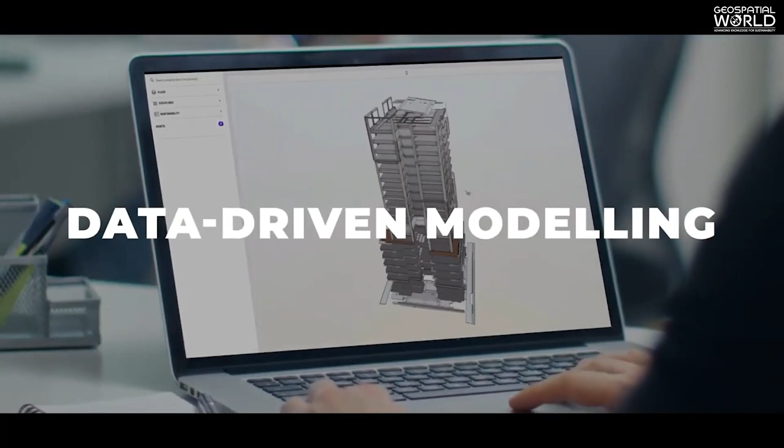Advanced digital approaches involving data-driven modeling and visualization now offer architects, engineers and construction professionals new ways of understanding how cities function and predicting how changes in their design could affect lives.

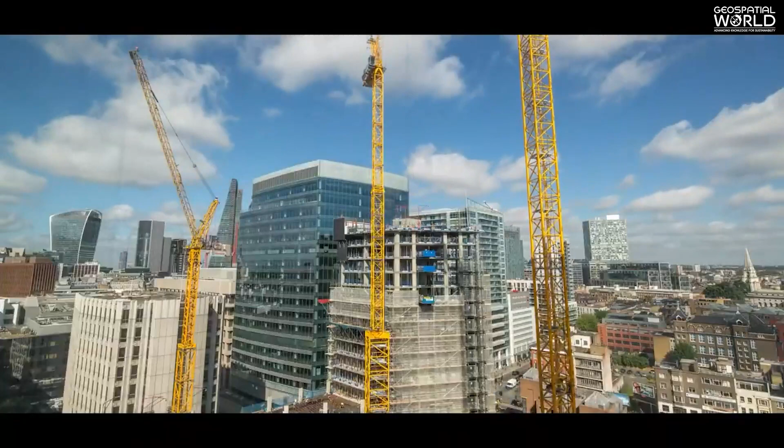Digital twins improve the planning and construction process to make it as time and resource efficient as possible. Digital twins can improve environmental performance and productivity of individual buildings and asset infrastructure once in operation.

Feeding the twins information into advanced analytics and data models gives operators the ability to undertake predictive maintenance, minimize downtime, and identify potential problems. The growth and convergence of technologies like the cloud, artificial intelligence, machine learning, 5G, and IoT are propelling digital twins to the forefront of the AEC industry and city infrastructure management, with geospatial technologies as the enabler.

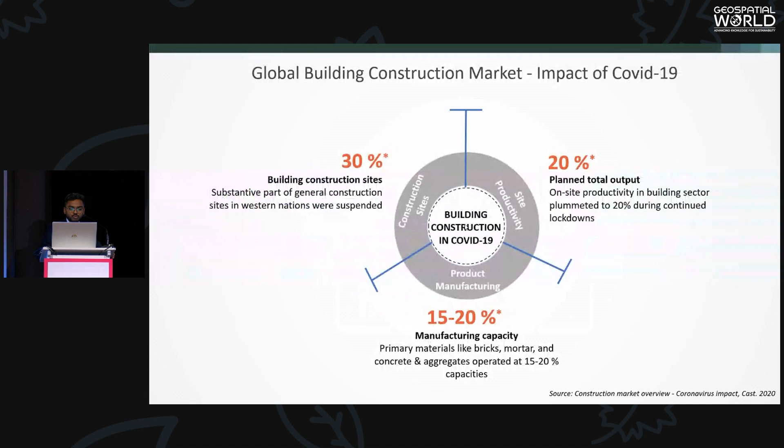I'll just quickly walk through the type of impact that COVID had over the global building construction market in the year and a half since the pandemic began.

A lot of construction sites foreclosed. Around 30% of construction sites witnessed a substantive impact in terms of suspension of projects on-site. Around 15 to 20% of manufacturing capacity was impacted. A lot of raw materials and supply chain had to be revamped. 20% of planned total output underwent a significant reduction.

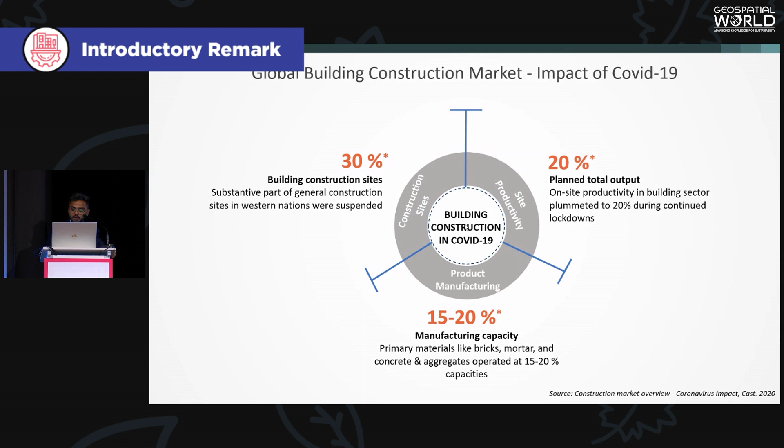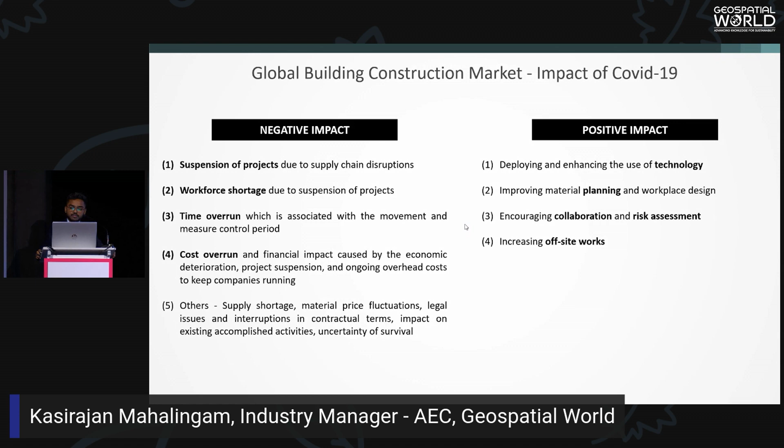Moving on, there were not only negative impacts for the industry, there were a few positives as well. The deployment and enhancement of technology saw increased uptake, especially across multiple disciplines. There was improvement in terms of material planning and management, as well as workplace design. There's a lot of encouragement in terms of collaborative and risk assessment-based project workflows. And there was an increase in off-site works, as well as other modern methods of construction like DFMA, etc.

Now coming into the whole GeoBIM ecosystem and how the industry started using an integrated GIS and BIM platform, not just for your regular on-site construction progress monitoring and tracking, but across a series of other COVID-based challenges that had to be overcome. So on one hand, you had to monitor the risk associated with COVID and COVID-induced closures on-site, and that was done using on-site risk monitoring.

So nothing new here, but the whole positioning system-based technologies, be it GNSS or GPS systems, were used to track and monitor movements within the construction site. And this was particularly witnessed in the Middle East region, wherein despite the construction market taking a heavy blow, a lot of contractors and subcontractors were able to keep their projects alive.

Connected construction became a whole different game altogether because they were able to understand and predict project outcomes, not through physical monitoring on-site, but off-site, you were able to gather your project data and project information, be it for materials, machines, or your workforce, and connect it across the value chain and the life cycle.

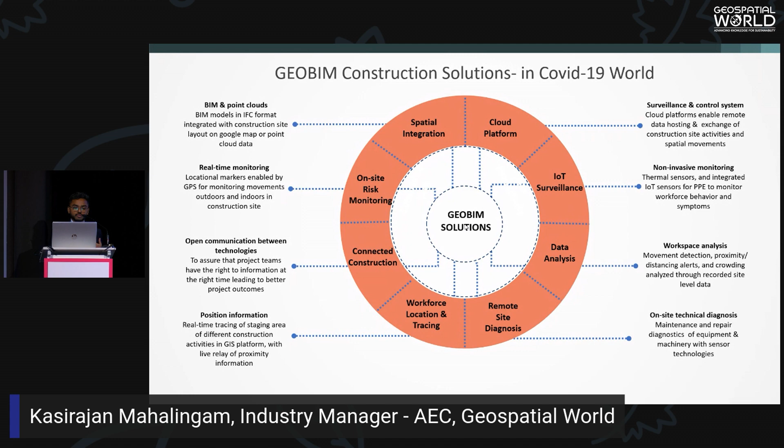There were other analyses that took place as well. For instance, BIM and IFC format-based data platforms, they've seen a larger uptake and significant integration over cloud and cloud-based collaboration.

So what do these digitalization solutions have in place for the overall market? This is a data figure that caught everyone's attention during the release of last year's McKinsey report. The whole market is bound to have a profit of around 265 billion US dollars based on these different factors and their implementation.

Starting with industrialized construction, where you have a product-based approach instead of a project-based approach. Moving on, the intake of connected construction solutions allows you, as we discussed in the previous slide, to connect data between machines, materials, and workforce. Then digitalization of products and processes, especially to assess the level of uncertainties and risks taking place both on-site and off-site.

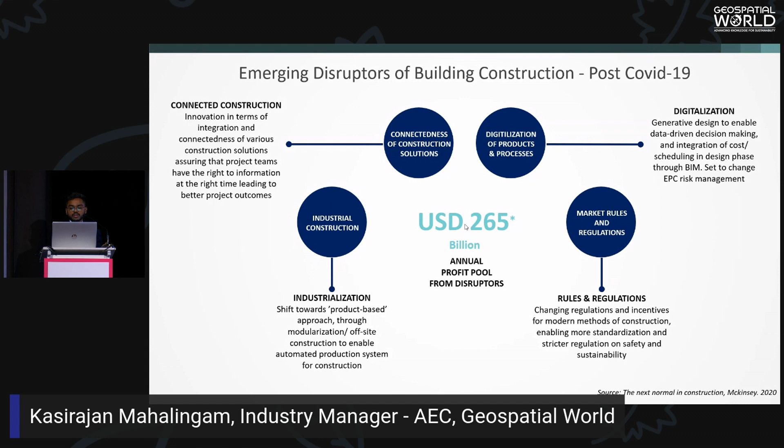And of course, there is a level of standardization required for project data, both in terms of data collection and data processing and analysis, so that every stakeholder associated in a project across the value chain is able to access, use, and modify the data accordingly.

I'll quickly walk through the technological evolution we've foreseen in the last couple of years. Interestingly, in the last week or so, we saw the release of ArcGIS GeoBIM. So a lot of leading technology providers are realizing the need for integrating these different digitalization measures, because data in silos, especially for an industry like construction, would never help envision solutions in terms of sustainability, risk reduction, and reducing cost and time overshoot that has plagued this industry for decades.

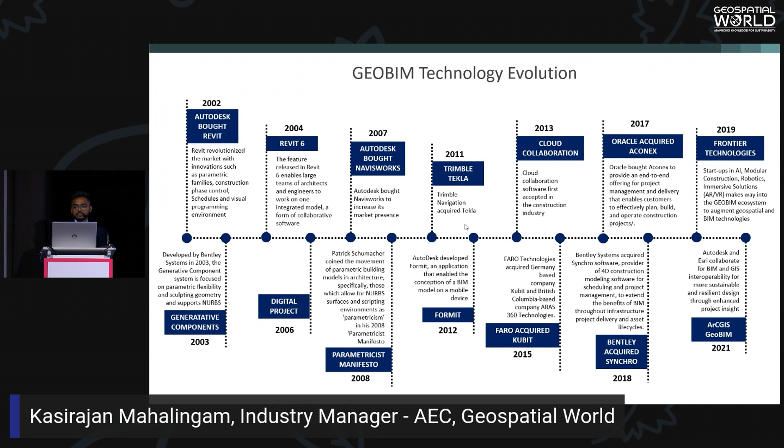In terms of technologies, there has been a series of increase in mergers, acquisitions, and partnerships. Especially since 2018, we've seen a surge in multiple big companies coming together, encouraging startups and other initiatives with smaller and medium-sized companies, to make sure these indigenous solutions are scalable and can be adopted across different regions of the globe.

So a few main players, like Autodesk, Faro, Bentley Systems, and Trimble, have been engaged in larger uptake of mergers, acquisitions, and partnerships in Q3 of 2021.

This is in-house research that Geospatial World has been conducting in terms of understanding and mapping the type of technologies, to make sure an end user is able to move forward in applying these different technologies across the project life cycle.

We were able to devise a mechanism wherein we put together technologies from a foundational level, be it total stations, CAD, or BIM models, to digitalized elevation models, and connect that across the different stages of the project life cycle.

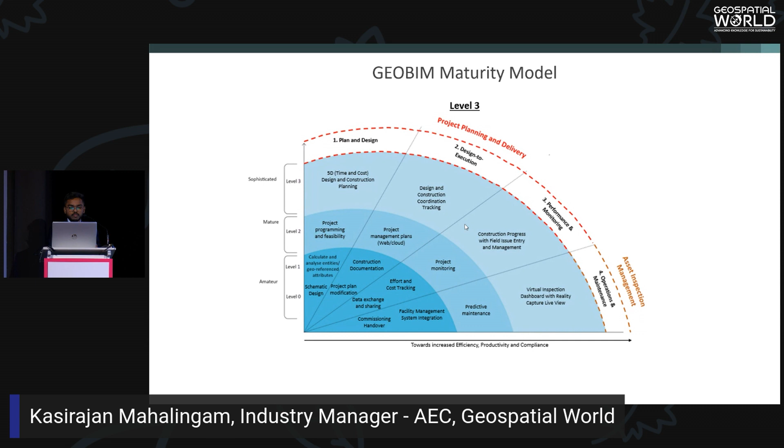We would also like to see the end users reduce their physical connection on site and leave it up to the technicians who are only required to stage their machines or materials, and use as much offsite monitoring and inspection as possible. That way you're already reducing the emissions and energy consumption required to go check these sites, and also you're able to have transparency across the project lifecycle to every stakeholder who was involved.

There's also an improvement in terms of repeat business from existing clients because, A, you are able to reduce your wastage and cost overruns, and B, you are able to meet the target deadlines within time because you are on top of the projects throughout the course of the life cycle.

Coming back to the GeoBIM Readiness Framework, now how do we assess GeoBIM readiness? How do you assess a project or a region, for that matter, in terms of their readiness? So the Geospatial World research that we had done took into account three major pillars: user adoption, the policy framework that is in place, and industry offering.

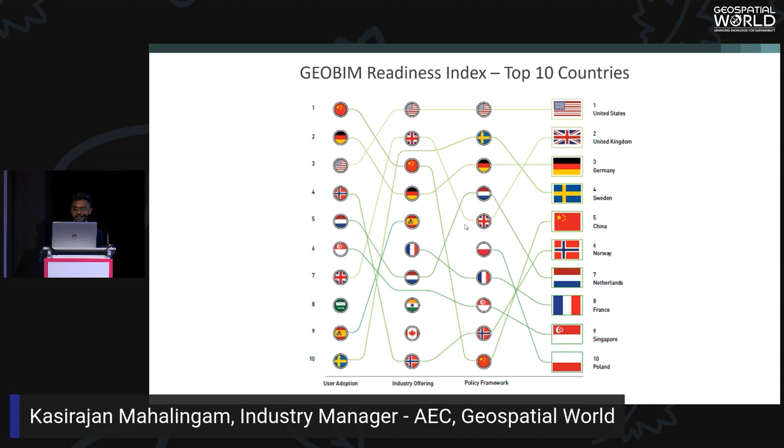So that's my introductory remark for this session. Thank you so much.